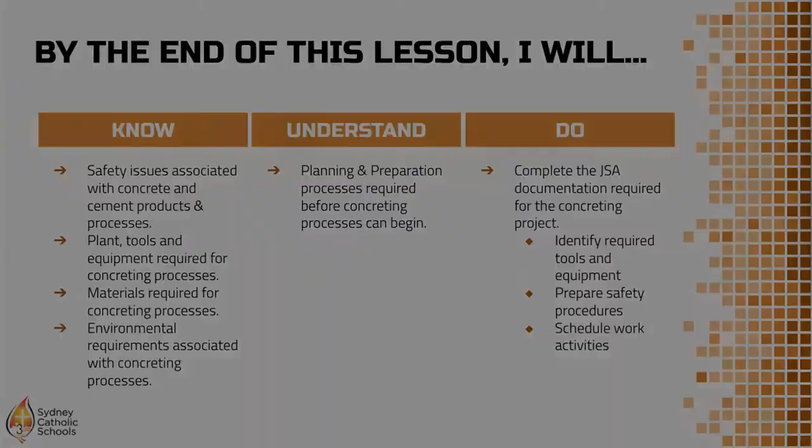At the end of today's lesson, I really hope that you're able to start your JSA documentation. So this should include the tools and materials. It should include some of the hazards specifically around these materials and this concept of crystalline silica and silicosis and the dangers associated there. And we'll really be looking at what do we need to do to get started with concrete. So here we go. The first thing we need to know is that there are some safety issues associated with concreting processes.

The first of all is when we are doing concreting processes, we are dealing with an extremely heavy material. And I say that because we are concreting large areas, so the volume of material we're using is usually quite large, and as a result, the materials then become heavy because there's lots of them. I'm also saying that manual handling is an issue because when we order our concreting materials, they either come in bags of 15 to 20 kilo sort of weights, or they come in 1-ton bags delivered from the back of the truck, or they come as bulk loose materials by the ton on the back of a truck. So they really come in bulk materials, and they're heavy materials. There's lots of them. Therefore, we've got the manual handling things to consider. So there's some of the basics.

The other thing that a lot of people forget about is when we're moving concrete around and getting ready to place it, we quite often do that using a wheelbarrow. So we put this liquefied material, this liquid concrete, into a wheelbarrow, and we wheel it across the job site from the mixing point to the placing point. And as we're doing that, we've got this heavy material in the wheelbarrow that is liquid, so it's moving from side to side, and there's a lot of strain being placed on the body. The temptation there is always to increase the amount of concrete we've got in the wheelbarrow beyond its limit, and that obviously increases the chance of an injury. So what we need to consider is how we can control those processes to prevent us from getting injured.

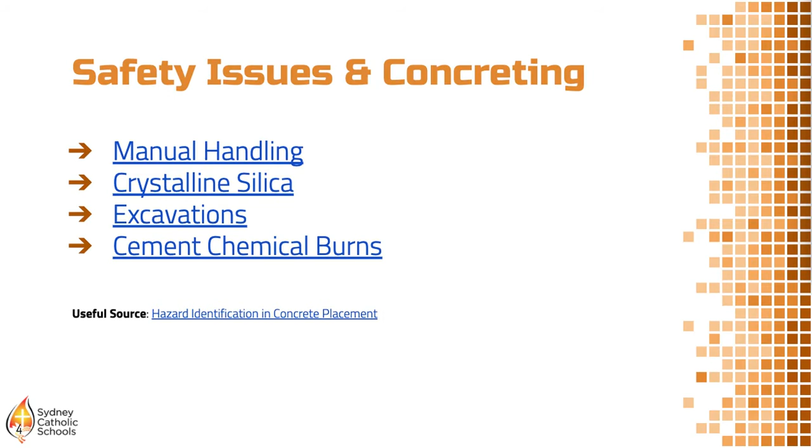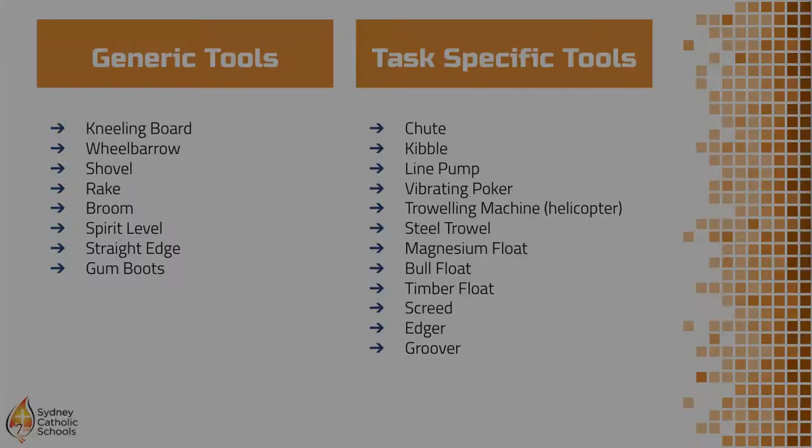So let's get started. The first one is the chute. The chute is basically a little half tunnel that helps to direct the concrete from the truck to where it's being placed. So it either, as you can see in the image there, goes directly from the truck into the formwork ready for placement, or if the place that we need the concrete is inaccessible by truck, then it goes from the truck down the chute into the wheelbarrow, and then the wheelbarrow takes it off to where we're placing the concrete.

The idea of the chute here is to try and soften the angle to prevent the splashing of the concrete, and also, given its extended range, helps to make sure we're able to put it in the right location. The truck only sits in a single position, and if we've placed the truck appropriately, by changing the length of the chute and the direction of the chute, we really hope that we're able to do a lot of the concreting process without having to manually handle the weight of the concrete in a wheelbarrow.

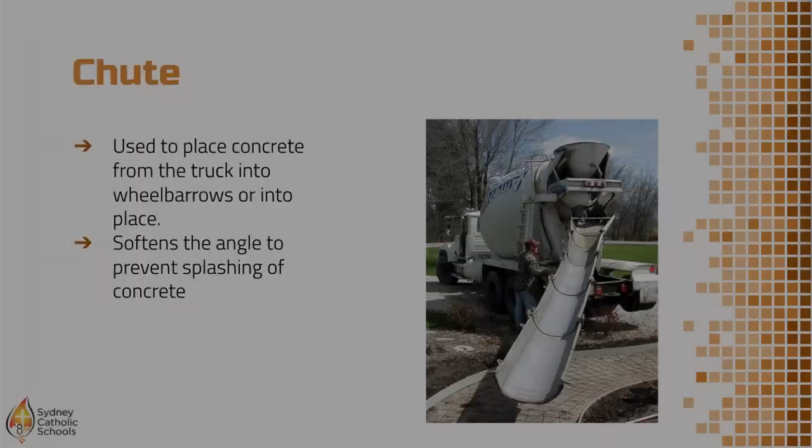Second device here is a kibble. Now, I'd be very surprised if you're going to be using this in our school-based application, but effectively, this is a bucket. This is a really heavy-duty bucket that connects to a chain. You fill this bucket with the concrete mix, connect it to a crane, it gets lifted up into those high-rise applications, particularly if we're working in high-rise buildings, so that concrete can be placed on the roofs of buildings and on high stories, okay? You can see it's got a little built-in chute there that's being chained up, and so when it's ready to place, the chute comes down.

There's a lever on the right side just over here. If I just turn my pointer on, there we go. You can see there's a lever here which opens the bucket up, enabling the concrete to be poured. This here is the chute, which enables the concrete to be directed and softens that angle to prevent that splashing again.

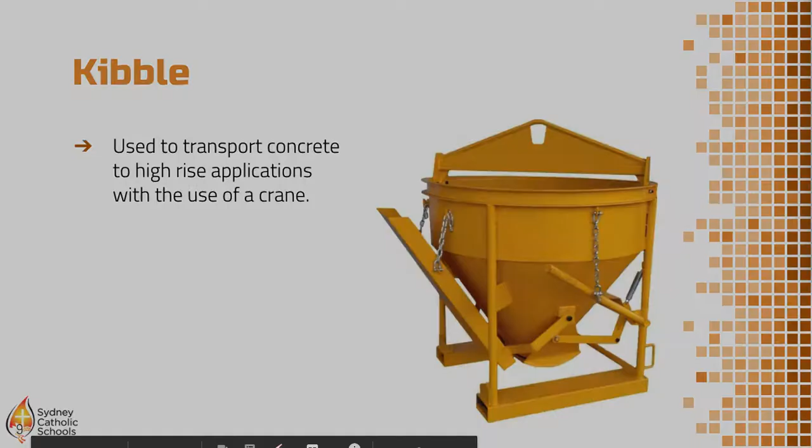The next tool across is a line pump. Again, this is for those larger applications, okay, where they're placing concrete in many positions. A crane might not be necessary, but the idea here is it's effectively increasing the range at which we can deliver concrete on a job site. So it's across long distances, and because we've got a crane arm, we can also go over physical barriers, things like fences and small buildings, okay, to make sure the concrete is placed where it's needed. Again, this prevents us from using that manual handling process of the wheelbarrow, which can cause significant danger, and obviously at the end of a large day of concreting is very straining.

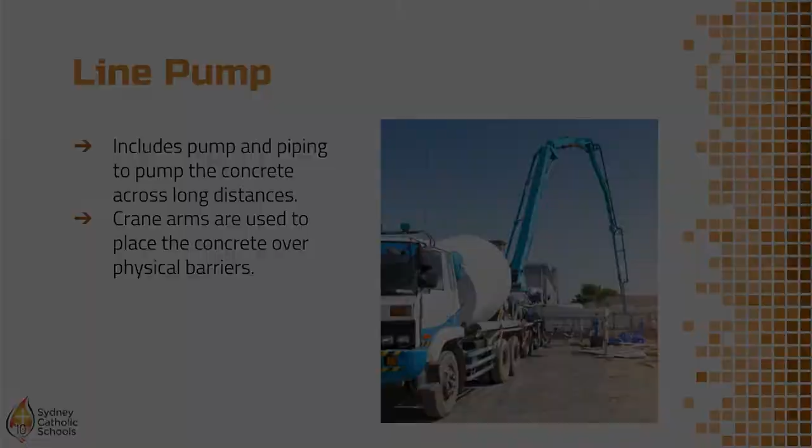The next tool across is the vibrating poker. Now, the idea of this device is to compact the concrete. When we mix concrete in a mixer, we are mixing dry ingredients with water, and a lot of air gets pushed into the mixture, which prevents it from achieving maximum strength. This device is placed into the concrete while it's wet, while it's in its formwork. It's placed in, you turn it on, the little end point here makes a small vibrating motion, and that vibrating motion raises the bubbles to the surface of the concrete, therefore compacting and increasing the strength of the concrete slab.

Troweling machines. Now, there are hand trowels, but a troweling machine is obviously a mechanical aid, and this could be either walk behind, like you can see in the image, or ridden, where it's like a ride-on mower, but instead of having blades that cut grass, it's got blades that trowel the concrete. It's effectively a fan where the blades are touching the surface of the concrete. It helps to smooth it out. They're really used in large slab applications. You wouldn't use it in a small 4 square meter slab, for example. It wouldn't be worth the cost of hiring this particular device.

The benefit of using this is it avoids the trowel lines that are caused by rectangular trowels and the edge and the cutting into the slab that quite often happens. So it helps to give that really smooth finish. Because it's mechanical, it obviously works a lot faster than the average human can on their own.

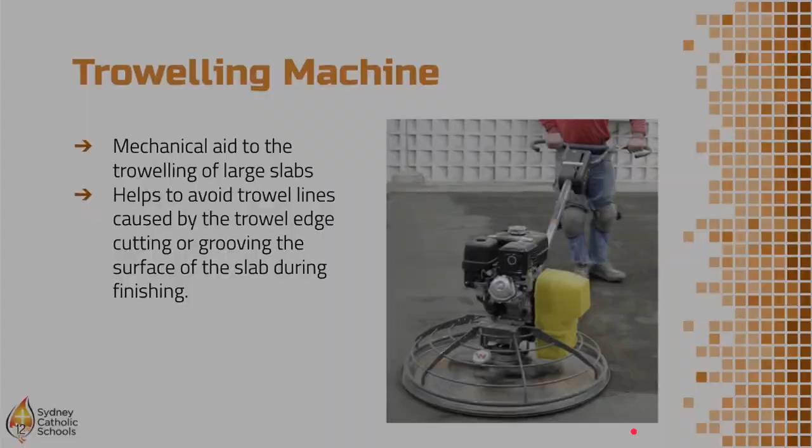So now we start talking about those hand processes. The first of the hand processes I'm talking about here is a steel trowel. Now, a steel trowel is made from steel. Okay. Now, it's specifically important that we remember steel because there are some other metal trowels and floats that are used that are not steel, and they have different applications and different purposes. So the steel trowel gives us a smoother finish than a timber float. Okay, because it's a metal, it doesn't draw water up to the surface and drag the concrete, so it doesn't stick to that wet concrete surface, okay, and helps to give us this really smooth finish.

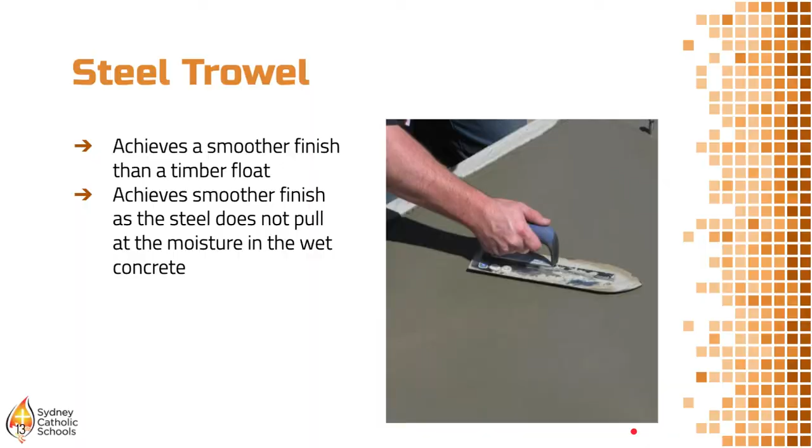So this helps to give us this really smooth finish. Next across is another troweling or float device. This is a magnesium float. Now, this is again similar to the steel trowel. It doesn't drag the surface of the wet concrete slab.

But the benefit of this one is magnesium is a lot lighter than steel. Therefore, it's less onerous on the person doing the finishing of the slab. It prevents them from getting physically exhausted from the weight of that trowel across a whole day of finishing.

Now, in small application, the difference between a magnesium float and steel float probably wouldn't be noticed too much. But at the end of a 6-hour day of troweling and floating a concrete slab, absolutely the weight would make a very big difference. We've also got bull floats.

Now, the bull float is really used for larger slabs. Again, this is particularly helpful if you can't reach the whole slab from the edge. It's got a really long handle. It's got quite a long base with a leading edge on both the front and the back so that you can push the concrete into position and pull the concrete into position in the floating process.

Okay? Now, as you twist this handle, this mechanism here either raises the back edge, or it raises the front edge to become the leading edge depending on which way you're moving. Now, if we're floating in this direction towards the left of the screen, then you want this edge, which is called the leading edge, to be pointed up slightly so it can push excess concrete forward. Otherwise, your float actually digs down into the slab.

Then when we're pulling backwards, we're going to the right of the screen, the back of the bull float becomes the leading edge, and it is then pulled towards you again to drag excess concrete.

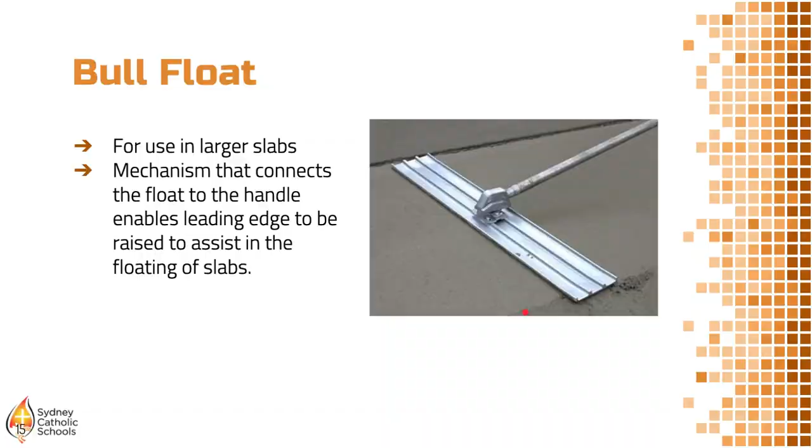Now, the screeding process. Screeding is this process of using a straight edge, a long straight bit of material, sometimes metal, sometimes timber. It rests against the formwork. So you can see we've got the straight bit of timber. It rests against the top of the formwork and is pushed back and forth, and it sort of cuts the concrete effectively. It feels like a cutting motion, like you're using a saw.

And then it drags the concrete to fill the gaps along the edges here, while also smoothing and pushing excess concrete down into the unfinished parts of the slab. Okay. The back and forth motion helps to fill those air pockets. Again, this is part of the compacting process. Helps to fill the air pockets near the formwork edging.

Helps to push the excess concrete along the slab. And also helps with the leveling process. So if the top edge of our formwork is level, screeding using the formwork edge obviously then helps us to produce a level slab.

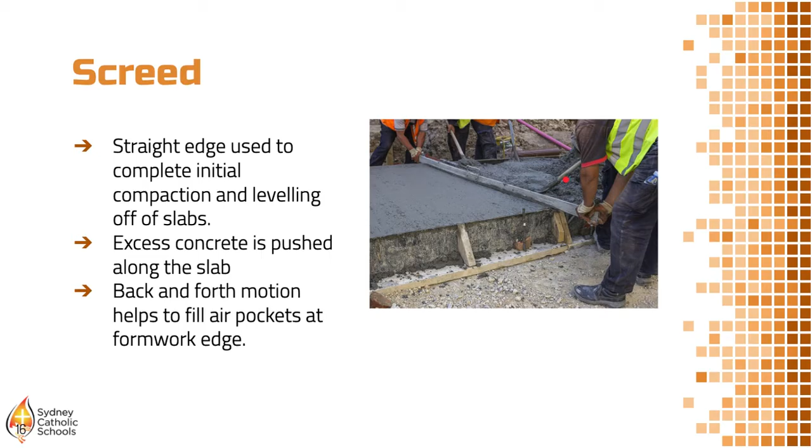Edging is another process that's involved in concrete placement, and an edging device or an edger is basically a small handheld metal device, you can see, handle there. That's just the width of your hand, so it's only quite small. You can get larger ones. It's got a flat edge here which goes along the top of the slab, and then it's got this sort of bull nose along the corner and a slight downwards face.

That there is the edge of the slab. So to prevent you from having a sharp corner on your concrete slab, this bullnosing process helps to give this nice rounded edge that's a little bit softer. Now, you use this at two different times.

You will use this initially when the concrete is being placed, just to drag any aggregate out of the way. It's not actually doing any edging. You just use it to make sure that there's no little rocks or aggregate pieces sitting where you're going to be rounding the edge, because if you wait till later, then that will drag and create a hole. So you do that right at the beginning while the slab is wet, just initially to cut into the edging.

And then once the slab becomes a little bit plastic, so after a couple of hours of its placement, when it becomes quite firm and you've got the bleed water coming to the surface, you would then go across with the edging device again, and that's when you would actually complete the edging, smoothing off that edging, nice rounded edges, no dragging gaps whatsoever, filling them back in with a trowel where required.

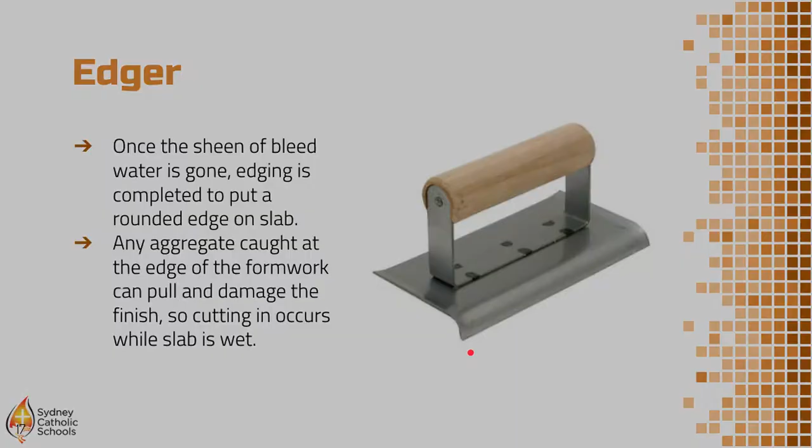Grooving is another tool that is used, and again, we'll look at this during our processes point, but this is where we intentionally put crack points into a concrete slab. The idea is to weaken the slab where we want it to be weakened, so that if it does end up cracking, it cracks where we want it to crack, right along these control joints. Again, this process is completed after the bleed water has been reabsorbed, so once the slab has gone quite plastic. So after that water process has happened, you don't do it during the wet slab, otherwise it will just keep leveling itself back out.

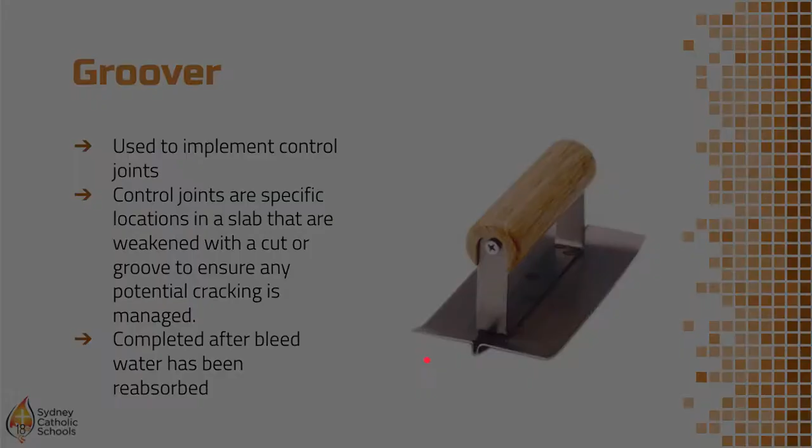So that's the tools and equipment that we use specifically for concreting. Again, you can go to your JSA documentation, update them, explain how they're used, and start thinking about the risks that might be associated with them. And we'll now move on to those three key ingredients of concrete.

The first being cement. Cement is a binding agent. It is a very fine dust. You add water with it and it becomes like a thick glue paste. And it glues together the two different aggregates that we use, the fine and the coarse aggregate.

Cement contains crystalline silica, and as a result, there are hazards associated. It may cause irritation to your skin, it's quite alkaline, therefore chemical burns. May cause serious eye irritation, again, chemical burns. May cause respiratory irritation. That's that fine crystalline silica dust we're talking about. And may cause damage to organs through prolonged or repeated exposure. Again, that's that crystalline silica process.

It tells us to wear gloves if we're going to be handling it, which is absolutely correct, and goggles as well. And that's minimizing the chance of our skin and our eyes and our lungs from getting in contact with this quite dangerous material. If it's managed, it's safe to use.

Okay. For your assessment task, you actually need to source the most up-to-date safety data sheet for Boral, and you need to submit that as part of your task. And when you do that, you should identify the appropriate controls that have been recommended in the safety data sheet by the supplier and place that into your JSA documentation.

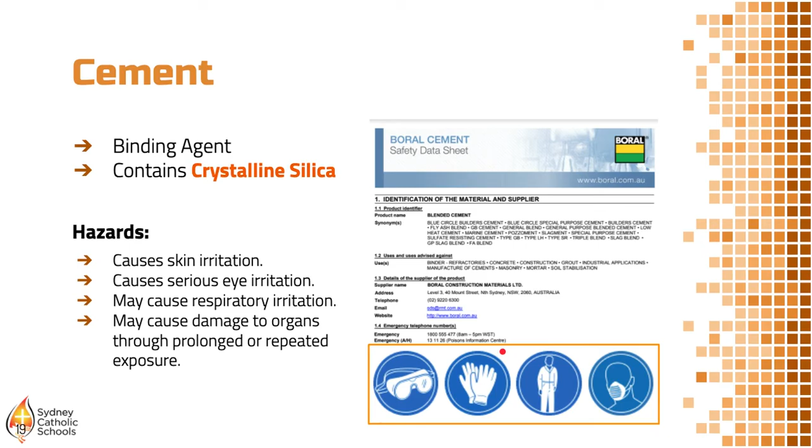Next along is the fine aggregates. Now we talk about aggregates. Aggregates are stone or quarry materials, and there are two types we use, fine and coarse. Fine are really small particles. They're bigger than cement dust, but they're smaller than the coarse aggregates. The fine aggregate that we use here is sand. Again, contains crystalline silica.

Basically, it is a mixture of sand or quarry dust, landscaping materials. There's a whole heap of different applications here, but again, there's a hazard associated with crystalline silica, damage to the organs through prolonged exposure. The same PPE requirements apply.

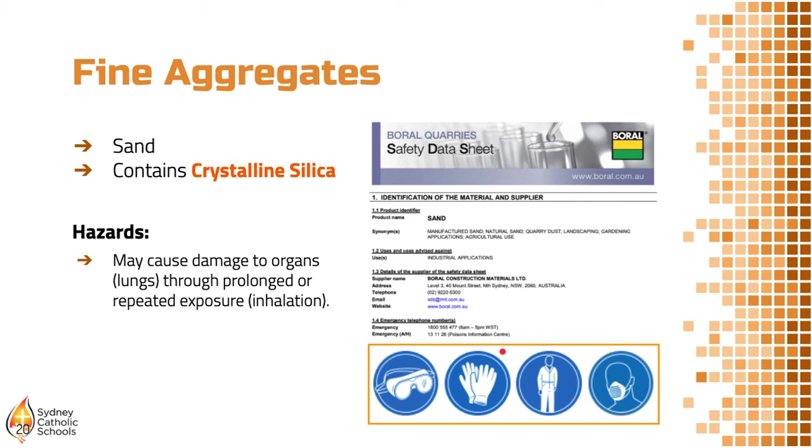Lastly, we then have the coarse aggregate. So these are the larger particles or the larger pieces of aggregate. We usually use blue metal. My preference for smaller slab processes is 10 millimeter blue metal. It's a little bit easier to work with, but 20 millimeter is quite commonly used as well, or any range within there is quite commonly used for slabs.

If you're just working with it, not cutting into it, but you're mixing it into a cement mix, the particulate respirator is suitable for that. Okay, but check the details on your safety data sheet, because each time these data sheets are updated, and this is from last year, the recommendations may change. So obviously refer to the current information before you go off and do any concreting work.

So that's the end of today's lecture. That's the introduction to the concreting process, the tools, materials that are required, the planning processes that we need to think about before we go anywhere near starting a concrete slab.